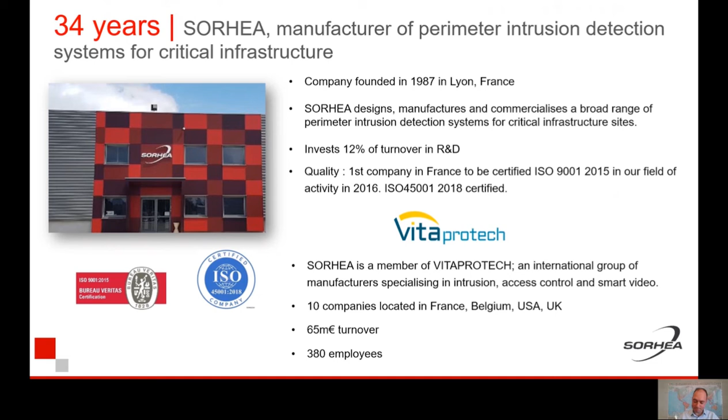At SORHEA, we have 5 different technologies available to secure your sites: active infrared barriers, shock detection cables, dual technology motion detectors, electric fence with detection, and video analytics. Having a broad range of different technologies is a real strength, because it gives you the possibility to choose the right technology according to your site requirements, environment, and security threats. There isn't a magic technology that can be installed everywhere, so having the right one for the right situation is a real plus.

It's also possible to mix different technologies together on the same site to further strengthen your perimeter security, and having technologies from the same manufacturer sending alarm information to one unique centralized point makes your life as a systems integrator much easier.

These products and technologies are being installed in multiple vertical markets. We're particularly strong within the industrial sector, so production sites, petrochemical sites, etc. Logistics and transport is also a key vertical market for us, whether it be car resellers, seaports, airports, train networks, etc. The energy sector is key as well, so we protect a lot of nuclear power plants, solar farms, energy production sites, local utility sites, water treatment plants, transformer stations, etc.

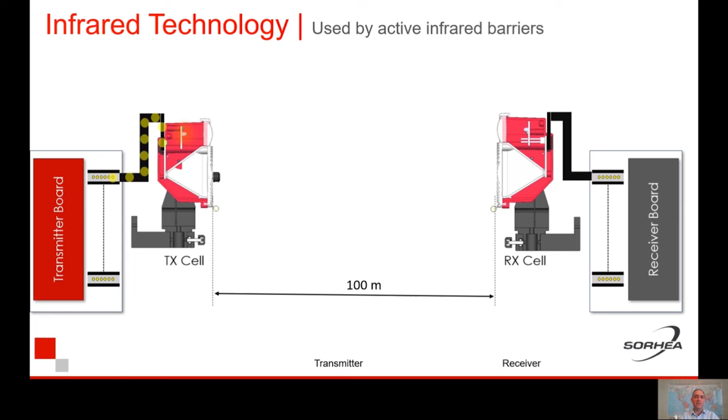So how is this infrared light used to make an infrared barrier? To make an infrared barrier, we have transmitter cells and receiver cells over a 100-meter range, and a transmitter board that sends an electronic signal to the transmitter cell, which switches on an LED light, generating a beam of infrared that is received and picked up by the receiver cell. This receiver cell converts that beam back into an electronic signal that is sent and analyzed by a receiver board.

Now, these beams are pulsed. They're pulsed for two reasons: firstly, to increase the life expectancy of your cells, up to 10 years, and also to avoid any interference from continuous light sources such as direct sunlight, car headlights, etc.

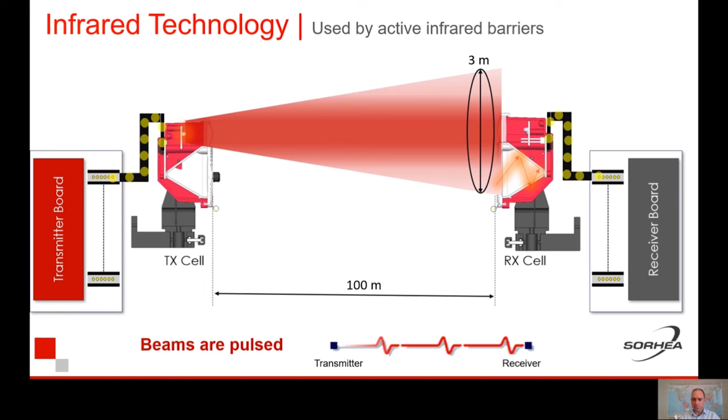Why choose active infrared? There is no magic technology that you can install everywhere. Every technology has its strengths and its limits, and active infrared does too. So what are the strengths of active infrared barriers?

First of all, they don't require much space to function, so a few centimeters is enough. We're talking about a virtual wall of detection around a site, on a facade, or on a rooftop of a building. Active technology is highly reliable, a technology that's been around for over 30 years, proven throughout the world in various easy but also hostile environments.

It's also very adaptable. You can adapt the use of active infrared technology to various applications within specific sites, and I'll tell you more about that later. Active infrared barriers are easy to install and set up. They don't require a lot of special tools to function, and maintenance is pretty straightforward. You just need to wipe the cover down once a year, realign the cells if needs be, and that's it.

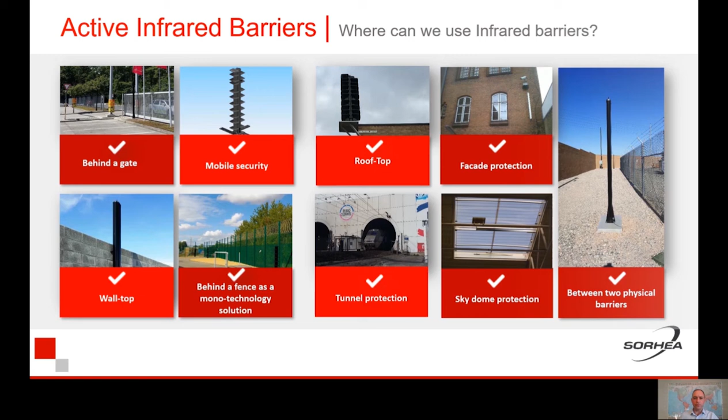What is unique about SORHEA's active infrared barriers? First, before we talk about the electronics, let's talk about the housing. We have 4 different housings available that can adapt to different environments and applications. The traditional one is the 3000 housing, installed on a pole that can go up to 5 meters in height.

With this housing, the infrared cells are installed one on top of each other, which means that on one side the bottom beam is slightly higher than the bottom beam on the other side. This was one of the main reasons we came up with a new generation of housing, the 3100, which allows all of the beams to be at the same height, especially the bottom beam. We call the 3100 the all-in-one housing because it also has an integrated anti-climbing cap that detects somebody trying to climb over the barrier by stepping on top of the column.

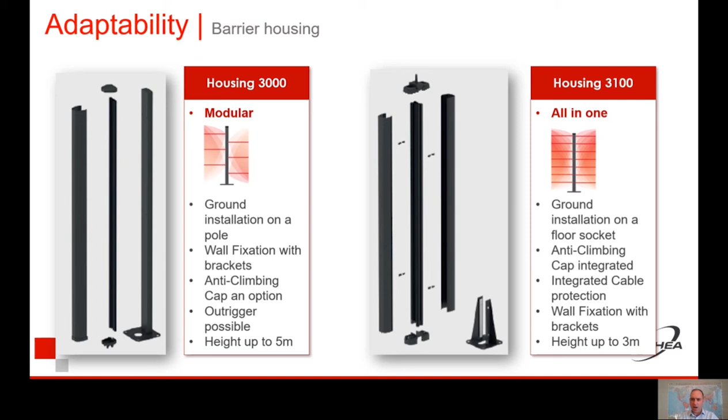We also have integrated cable protection with this product, and it's installed on a floor socket, which means the maximum height for the 3100 housing is 3 meters, not 5.

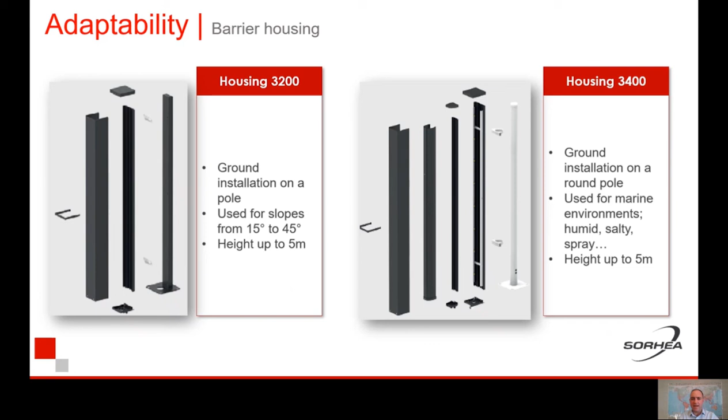We also have the 3200 and the 3400 housing. The 3200 is a special housing that allows you to install an infrared barrier on a slope between 15 and 45 degrees. The 3400 housing is designed with a double casing for use in marine environments where the air is very humid, with a lot of salt in the air that could corrode the electronics, and sea spray that can be a problem for more traditional infrared housing. So we have 4 different housings that can adapt to different site requirements.

SORHEA has synchronized and multiplexed beams. The transmitter and receiver cells are synchronized in pairs during the alignment setup. That means we lock transmitter number 1 to receiver number 1, transmitter number 2 with receiver number 2, to prevent any interference between several receiver cells receiving the same infrared light from the same transmitter.

Because we synchronize, it also means it's not possible to fool the system with continuous light sources, whether it be direct sunlight or car headlights.

Now, SORHEA has invented what we call multiplexed beams. What is that? It means we're capable of having the transmitters emit beams one after the other, 1,000 times a second. So beam 1 switches on, switches off, beam 2 on off, beam 3 on off, etc., 1,000 times a second.

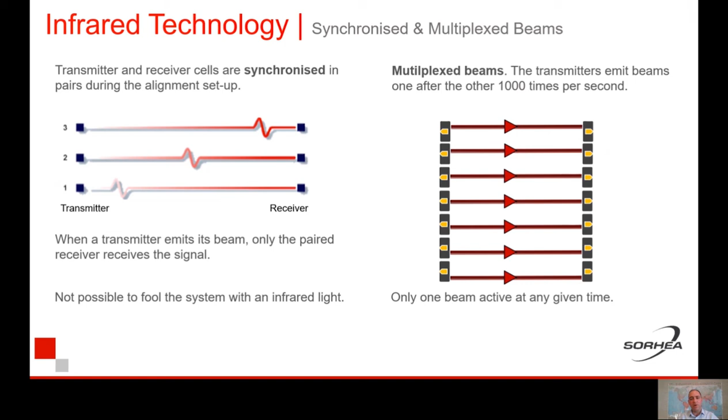The advantage of that is there's only one active beam at any given time. It also means we know exactly which beams are cut at any given time, which allows us to provide various functionality. I'm going to tell you a little bit more about that with the next slides.

Detecting is easy. Anybody can buy a detector for $100 on the internet and install it. It will detect, but the problem is it will detect everything. The secret is not necessarily detecting, the secret is filtering unwanted alarms. And to filter unwanted alarms, you need technology. Without it, you will detect everything.

Thanks to our synchronized and multiplexed beams, we have the possibility of providing you with multiple detection modes. First of all, you can have an infrared barrier that uses mono detection mode, which means you need to cut one beam to trigger an alarm. That makes the barrier quite sensitive.

You can decide to use dual parallel beam detection mode, which means you need to cut two parallel beams to trigger an alarm. The advantage of that is you filter unwanted alarms coming from birds or flying objects that cut one beam but not two. At the same time as having a dual detection alarm mode, you can have mono detection of the bottom beam to detect crawling, but with a delayed reaction time that will filter unwanted alarms coming from small birds or animals crawling through that bottom beam.

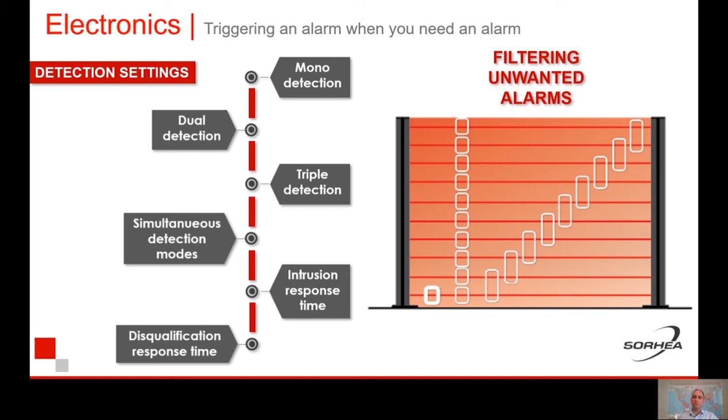Staying on the detection theme, SORHEA sells barriers. We manufacture and we sell barriers, we do not sell modules. Now our friendly competitors, as I'm sure you know, sell modules that they will install one on top of each other inside a barrier.

Each module is independent, and you can have dead zones between two modules installed inside a column. This is certainly not the case at SORHEA. We have barriers ranging from 1 meter to 5 meters in height, from 2 to 18 cells, and you can decide how dense you want your infrared barrier to be. You can choose a very high density infrared barrier with, let's say, 10 cells over a 2 meter height, or a more standard setup with 2 meters and 5 active infrared cells.

So you decide the density of your barrier depending on your budget and your security risk. Because we multiplex, we also only have one infrared channel per barrier. As you know, there are 4 available infrared channels. A module, for example, will use up a channel, so if you have 2 modules inside the same barrier, you already use up two infrared channels in one barrier. This is not the case at SORHEA.

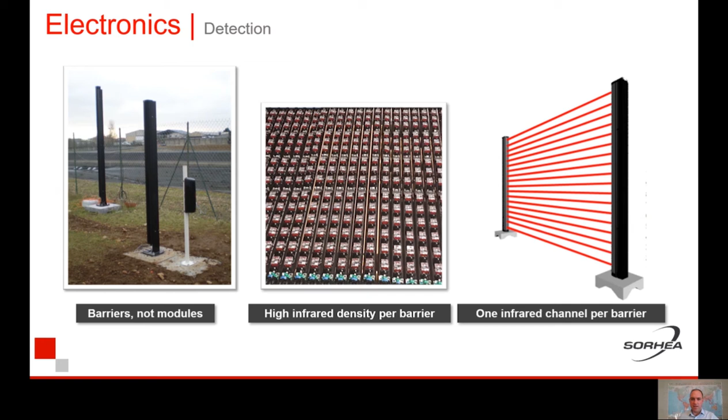Now, when it comes to alignment and setup, alignment is key because you can have the best infrared barrier in the world, but if it's not aligned correctly, then the detection is poor. We make this alignment as easy as possible.

First of all, before you align the beams, the columns are shipped to you pre-cabled and factory tested, so you have nothing to do. You don't need to waste your time installing modules and clipping modules inside a column and taking a risk that you get it wrong. All of the cables, all of the columns are pre-cabled and factory tested and ready to plug and play when you receive them. So you install your infrared columns on site and you align them.

We make this very easy for you with integrated alignment tools. We have what we call an alignment feedback, so you can align the cells using the infrared beam from the opposite cell. When you're aligning the cells, you're looking for the sweet spot in the middle of that beam. To make this easy, we provide a buzzer and LED lights. When you find that sweet spot in the middle of the infrared cell, you'll have a loud continuous beep from the buzzer, and all three LED lights will be switched on, indicating a perfect spot-on alignment.

You can lock the cell in place and move on to the next cell. Once again, no special tools are required. It's all integrated into the columns.

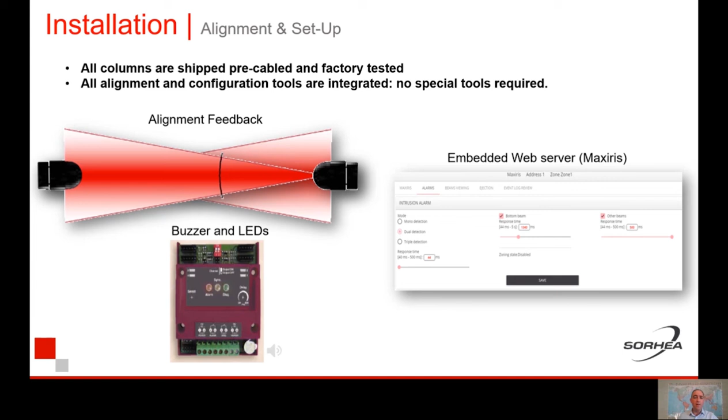We even have the possibility of setting up and configuring your barrier through a web interface. So you can log into the column via your network and adjust the reaction time of the beams, the thermostat heating, and the alarm mode that you require for your barrier. So no specific tools required, very easy and straightforward to do. Optimize your alignment and optimize your detection.

Now, when it comes to exploitation of the alarms, once again we provide you with various options that can adapt to your requirements. So for your infrared barrier, you can collect alarms from a secure radio network, so we can communicate the alarms via a secure radio network. We can also send them via dry contacts or via a bus, an RS485 bus cable. And we can also send them directly onto the IP network.

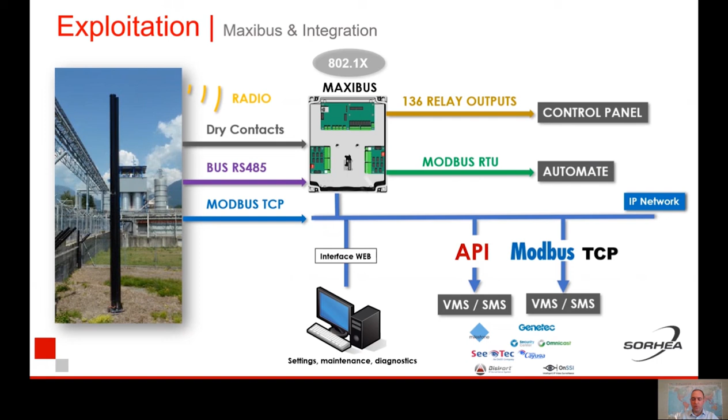In terms of maintenance, you have the possibility of remotely connecting to your infrared barriers via the network. So you can log in with an IP address, a login, and a password to any barrier on your site, and you get a live visualization of all of your beams on that site. So you can imagine that if a beam is poorly aligned or if it's damaged for whatever reason, you can clearly identify it on the web interface before sending a technician out to the site to fix the problem.

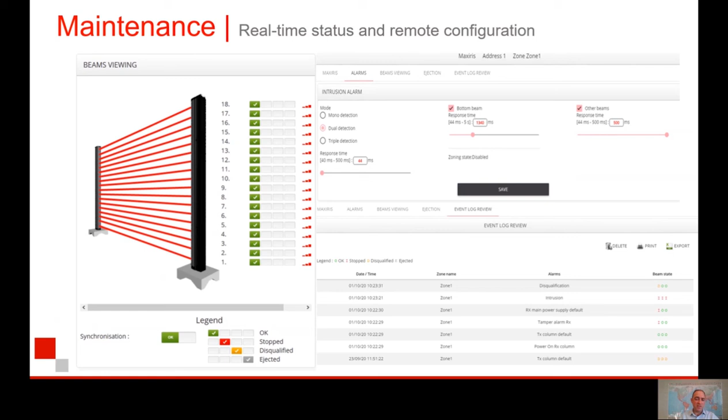Now remotely, you can also adjust the reaction time, the thermostat heating. You can adjust the detection mode, whether you want to be on mono, dual, or triple detection mode, and you also have access to a history log of the most recent alarm events.

We have additional functionality as well. We have what we call a zoning functionality. That optimizes the use of your video system, so a PTZ camera can zoom in to the exact zone where the intrusion is taking place to give you a very good view of that intrusion. The sizes of your zones can be configured through the web interface as well, so it's very, very flexible.

We also have a train filtering functionality. This is the Eurotunnel in France, and also we have the same on the UK side as well. So the train goes through the infrared barrier, there's no alarm. However, a human being walking through the barrier into the tunnel will trigger an alarm. So it's a very popular technology and solution for train tunnel protection.

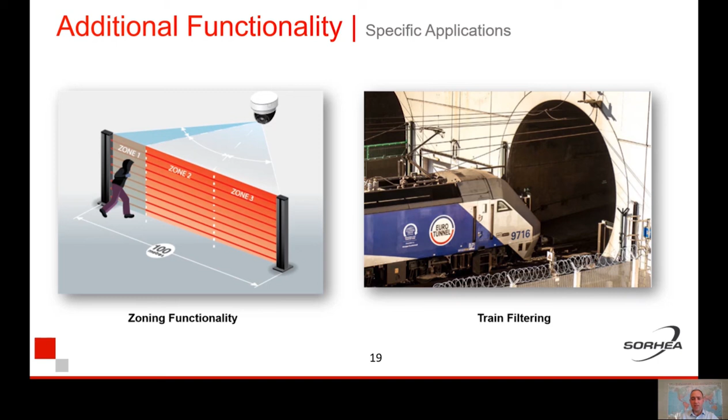So we have all of this technology, and we spread it out into a range of products. We don't just have one barrier, one product to present you. We have a range of different products and solutions that adapt to different types of security requirements, environments, and sites.

For example, we have the essentials range. The Maxiris is our top of the range active infrared barrier with advanced settings, remote maintenance, and multiple ways of communicating the alarm information. We have the Coloris, which is a more mid-range solution with no advanced settings, dry contacts only, but a more economic solution. But that's enough for many sites.

We have what we call the autonomous range, so the Solaris, which is the world's first and only wireless active infrared barrier. It's solar powered with an autonomy of 6 weeks in total darkness, and we send the alarms via a secure dynamic radio network.

Then we have what we call the specifics: the Uniris and the Biris, a small active infrared barrier that is used for gate top protection, wall top protection, or rooftop detection. An economic solution.

We have what we call the Miniris. The Miniris is our active infrared barrier for facade detection that we can paint in whatever color you want us to paint it, so it can seamlessly fit in with the same color as the facade of the building.